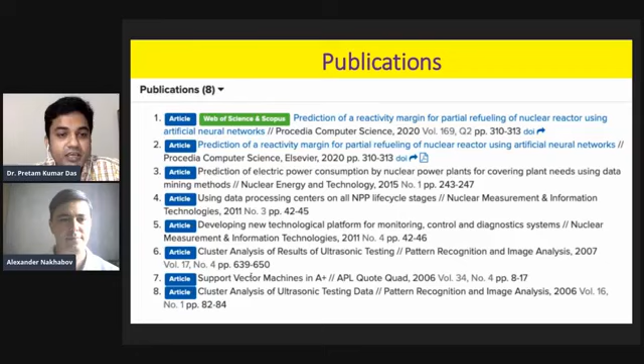His courses at MEPhI include Introduction to Nuclear Power Engineering, Monitoring, Control and Diagnostic Systems in Nuclear Power Plants, non-destructive and destructive testing methods on nuclear power plants, and nuclear technology. We also came to know that he has several publications in different journals worldwide. Thanks for your patience.

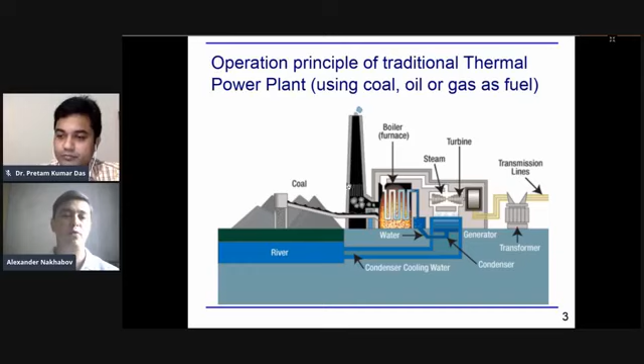So we should have nuclear fuel in some part of this reactor installation. Then we can initialize a fission reaction of uranium, and this fuel will get hot, and using water as coolant of the primary circuit, this heat can be transferred from the fuel to the water, and then in special equipment called a steam generator, this heat can be transferred from the primary circuit to the secondary one. Finally, in the secondary circuit, steam can be produced, and the steam will rotate the turbine, the same cycle as for a thermal power plant. So actually, all the main equipment of the nuclear power plant and all the main difference from a thermal power plant is concentrated inside this reactor building containment. So that's my idea.

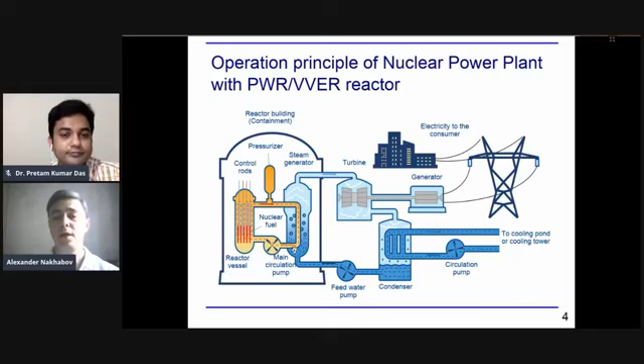As I said at the start of our presentation, I guess a lot of students in today's audience are from different specialties, different programs, maybe bachelor's, maybe master's. Of course, the first question can be: where is physics needed at a nuclear power plant? Because a nuclear power plant is a huge industrial enterprise producing electricity in a safe manner and so on. But this question is very good, because moreover, in the Russian Federation, and I guess in many Western countries, many years ago when we just started to develop this area, faculties of physics were the first, like the cradle of future specialists in this area, because physics is actually the basic course, the basic major for nuclear power plants.

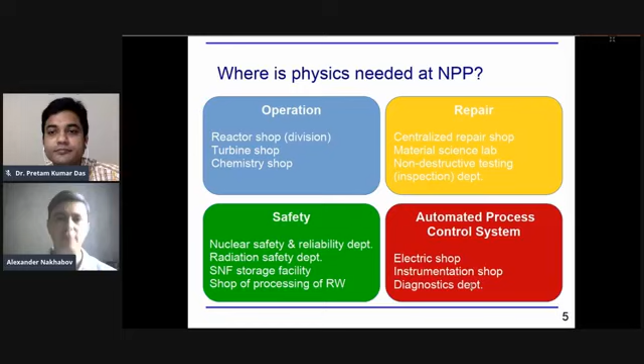For personnel in all these departments, as I know, it's a must to have in the curriculum, in bachelor's or master's programs, the main physical courses as some foundation for future knowledge. Physics is very important as a science and for future personnel of nuclear power plants. But the question is which physics areas are most needed. I'd like to comment on this idea because physics is the foundation of all future knowledge in this area. This picture corresponds to Russian tradition, Russian practice in training personnel for nuclear objects.

First of all, we say about general physics. I think in Bangladesh it looks similar, because in our universities, in MEPhI University, after enrollment in the bachelor program, students during the first two years will have courses in general physics first. The main areas are mechanics, molecular physics, electricity, magnetism, waves, and optics. For all nuclear-related specialties, during the first, not two years, actually 1.5, three semesters, this foundation of base courses in physics will be provided.

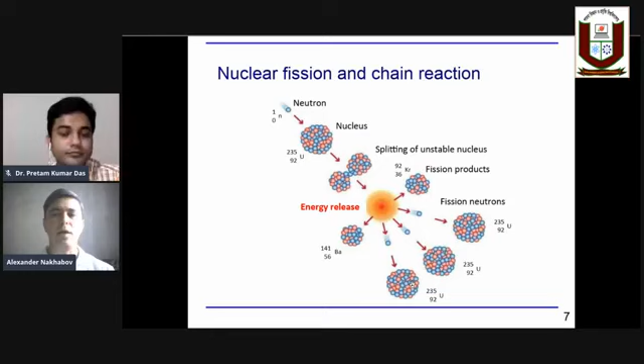And of course, there's the complexity of the task, of calculation and so on, because in a real nuclear reactor the structure is not simple.

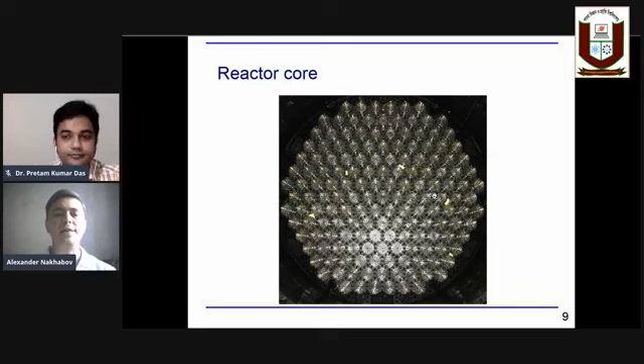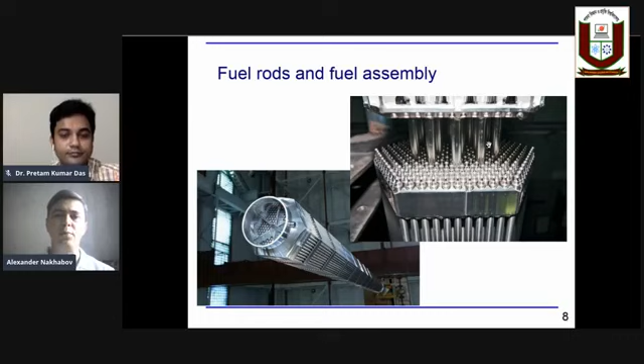Inside every, or rather the majority of, fuel assemblies, there are control rods. Actually, in a VVER reactor, control rods are not separated from fuel assemblies, but in many fuel assemblies there are special clusters, so-called clusters of the control system, located in these tubes. In this way we can distribute these control rods inside the core, just to provide a more even, well-distributed thermal production inside the reactor core.

So, of course, we should provide special courses, first of all regarding specific nuclear knowledge, and you see all these courses on this slide. Of course, these courses are needed first of all for specialists of the reactor shop and specialists of the Department of Safety and reactor diagnostics.

When we provide these courses, of course, first of all, it's lectures, seminars with solving of different problems and so on. If you say about using of computers, of information technologies, first of all, it's codes, special programs to calculate neutron flux, neutron interactions and so on. And of course, all these codes, it's about computers. This knowledge can be provided in special display classes and so on. But learning of these Neutronics courses, it's very desirable to have some labs.

But to provide labs, it's hard enough, because we need to have special facilities as usual. In our university, we solve this problem by collaborating with our partners in Russian Federation, in Obninsk, because Obninsk is the cradle, the place of birth of civil nuclear engineering in the world, because the first nuclear power plant in the world was put into operation in Obninsk especially.

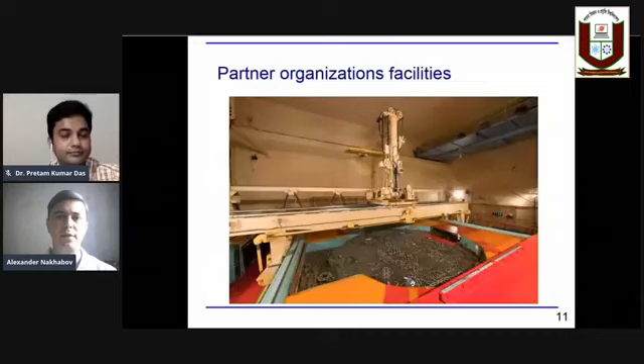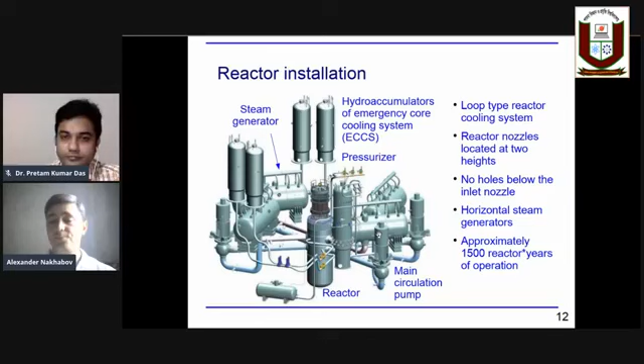And of course, when we say about the working principle of the reactor, first of all we should say, okay, first element, it's fission itself, like we just discussed - fission and heating of fuel. But next, we should consider how to get this heat from the fuel and how to transfer this energy, finally, from nuclear fuel up to the turbine.

During operation, water will go in this bottom line of nozzles of the primary circuit. And we have a core barrel - a special construction which helps us organize this flow of coolant. So water will go inside the reactor through this intake, go down in a small gap between the core barrel and the wall of the reactor vessel, and through special holes inside this core barrel, this water goes inside the core, through all fuel assemblies. In this area, heat from nuclear fuel is transferred to water, and then through the upper line of nozzles with hot water it goes out through the reactor vessel. So this is the idea of how to organize the cooling process.

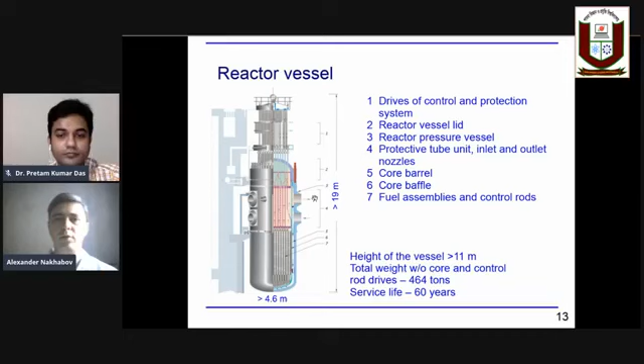And you know, it's impossible to get photos of a working reactor, because during operation the reactor vessel is tightly closed with special construction. But of course, there are several options how to see, how to look at a nuclear reactor vessel.

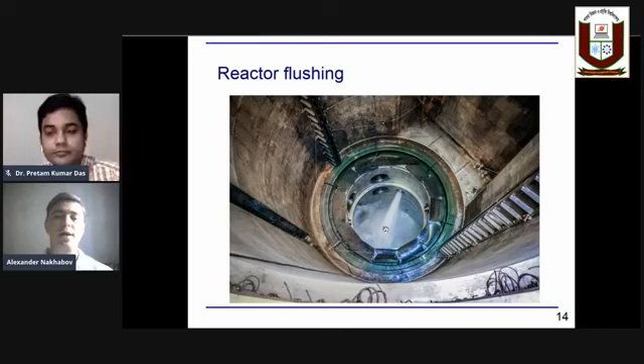And you see from inside the nozzles of the primary circuits. This nozzle, I guess, is maybe from the emergency cooling system, or from the pressurizer - yes, a special connecting line between the pressurizer and the reactor vessel. And fresh water just flushes all pipelines during this stage of testing. So it's just a very interesting photo to give you some understanding of how it looks like.

The next very important element when we talk about thermal hydraulic processes inside the reactor and about operating is steam generators. Steam generators are actually equipment that serves as a bridge between the primary circuit and secondary circuit, because we need special equipment to realize this process of transferring heat from primary to secondary circuit. This process is organized inside steam generators.

The idea is to provide a lot of very thin tubes. A lot means more than 11,000 heat exchange tubes, very thin, only 16 millimeters in diameter. So a lot of tubes are organized in a special manner inside this steam generator.

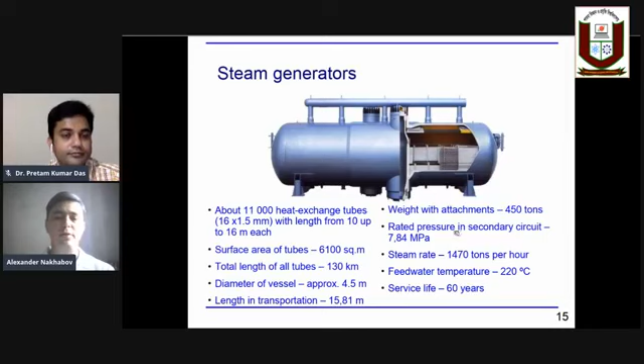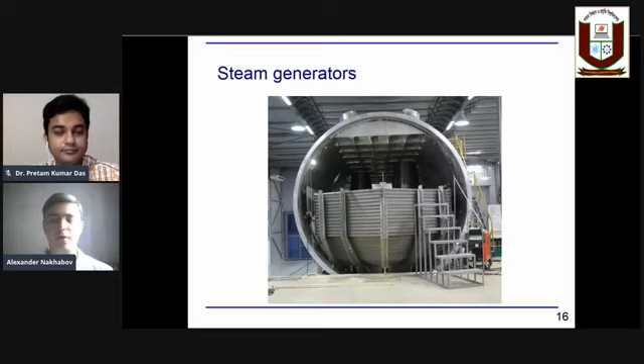But during manufacture, you can see the tubes and the special steam-separating construction in the upper part, and the black, dark elements are actually the collectors of the steam generator. So it's very big, very important equipment.

And of course, first of all, when we talk about main scientific areas, main courses, we talk about thermal hydraulics courses in this area, because to work with this equipment you should have knowledge in fluid mechanics, first of all, in heat and mass transfer, and metrology. Metrology, I guess you have this course in your university, is about how to provide measurements of different parameters and so on.

In our university, we have a very long practice of providing the metrology course based on special equipment, first of all for labs, first of all thermohydraulics equipment. Because on a nuclear power plant, we talk about measurements, but many measurements are, first of all, measurements of flows, flow rates, measurements of pressures in different pipelines, and measurements of temperature of liquids, of steam, and temperature of some elements. So metrology can be based actually on equipment used for thermohydraulics.

When we talk about education in this area, of course there are lectures, practices, and very importantly, laboratory works, laboratory practices. In our university we have a special resource center, because in MEPhI University nowadays there are three resource centers, two centers located in different cities in Russia, many kilometers away from Moscow, and one center located in the Obninsk branch of our university.

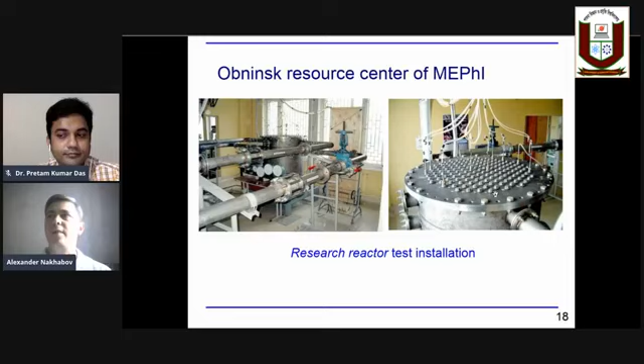We have some model, approximately 1 meter in height and approximately 1 meter in diameter, a model of reactor and pipelines around. And of course, we have some instrumentation to measure flow rates, pressure, and so on. This installation was used for many PhD theses, for student diplomas, and so on.

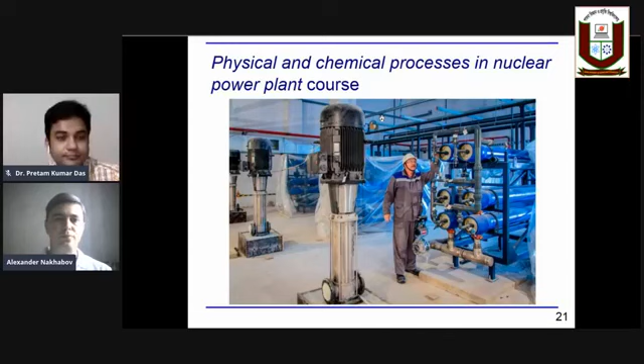The next level of consideration of the nuclear power plant is the secondary circuit, because now we have just considered the core of the reactor and the equipment of the primary circuit. The equipment of the primary circuit is the reactor vessel and all internals, steam generators, main circulation pumps, and the pressurizer. All of this is the main equipment of the primary circuit of the nuclear power plant.

But of course, we should also think about the secondary circuit. From one side, a secondary circuit of a nuclear power plant is not so specific to nuclear, because it's the same area as for a thermal power plant. Of course, the turbine for a nuclear power plant has its own construction, with some specifics in details, but the idea is the same. Nevertheless, the secondary circuit is very important, because especially in this circuit we can provide transfer of energy from steam to turbine, and finally to generator.

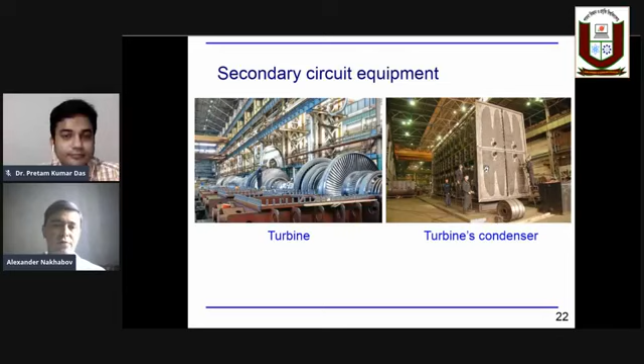So turbine condenser, you see scale, very big equipment, and it looks like modular construction. Inside, this structure you see looks like it has holes of tubes, because the condenser is actually a very big construction with a lot of tubes inside. It's similar to a steam generator, but in the condenser the idea is to provide outside water, for example from a cooling tower, pond, or river, through these tubes just to cool down the steam inside the condenser. So the condenser is very important too for a nuclear power plant. During operation, after mounting, this condenser will be welded inside all other systems.

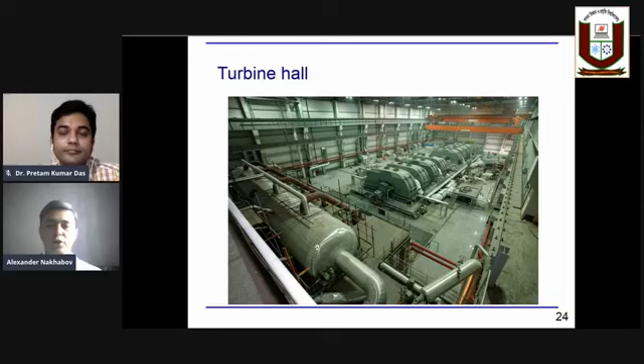And for example, this part is a bearing - a bearing of the shaft of the turbine. And I guess from our side is where the generator is connected to the turbine. And this big equipment in the front of this photo is actually the separator of the turbine, because between stages of the turbine there is separation and reheating of steam, just to improve thermal efficiency.

And all this equipment, the secondary circuit - the whole layout and structure is designed to provide the highest possible thermal efficiency. Every industry installation or facility that produces electricity or provides heat can be characterized by thermal efficiency, measured from 0 up to 100%, and of course our wish is to provide the highest possible value. For a nuclear power plant, unfortunately, this thermal efficiency is not so high as for a thermal power plant.

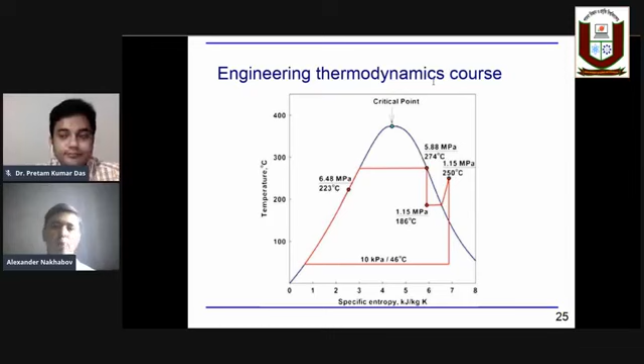When I said about the electric shop and instrumentation shop, of course, it's not nuclear in idea, because the electric shop is usually like electrical engineering, just to provide operation of all electrical equipment - a huge number, starting from usual electrical bulbs and finally up to generators. Personnel of this shop should maintain all this equipment in good condition. And when we say about the instrumentation shop, this personnel is responsible for all instrumentation, all gauges, all devices measuring different parameters. By the way, the number of personnel in these shops is very multiple, several up to 100 personnel in every shop.

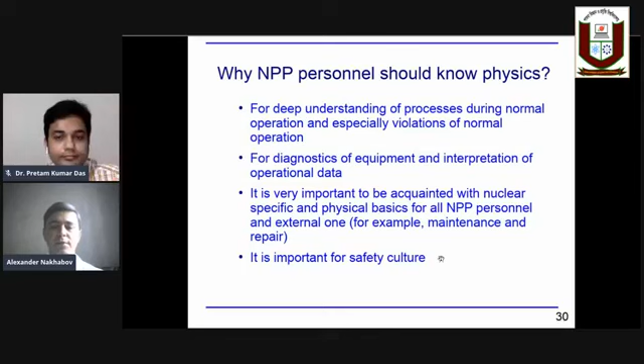Finalizing my presentation, I'd like to briefly say about the installations and facilities used to train students in our university. When we try to provide an upper level of knowledge in nuclear power plant operation, we use special equipment to collect all knowledge together.

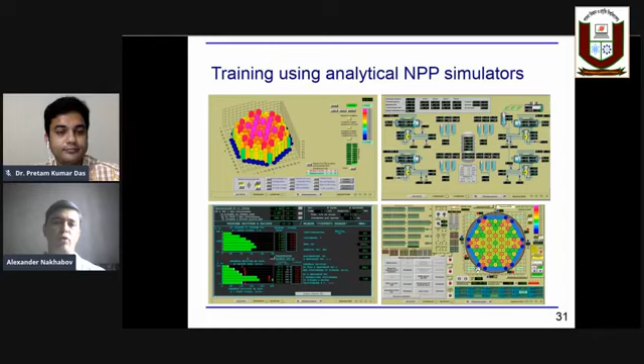You can see on the layout or diagram the cross connection of different variables, pressures, flow rates, and so on. You can model different situations on the nuclear power plant. These are special computer codes to simulate the behavior of the nuclear power plant in computer, which is very important to train future engineers and specialists for nuclear power plant.

Then we have special practical training. As I said, we have resource centers: the Obninsk Center, and two more in Novovoronezh and Volgodonsk. These are cities inside Russia, in the Russian Federation.

In Novovoronezh, there is the first in the world VVER 1200 megawatt power plant. In Volgodonsk, there is nuclear power plant VVER 1000, and also the Atommash manufacturing plant, where all huge equipment like reactor vessels, steam generators, and pressurizers can be manufactured. So we have special training for our students there.

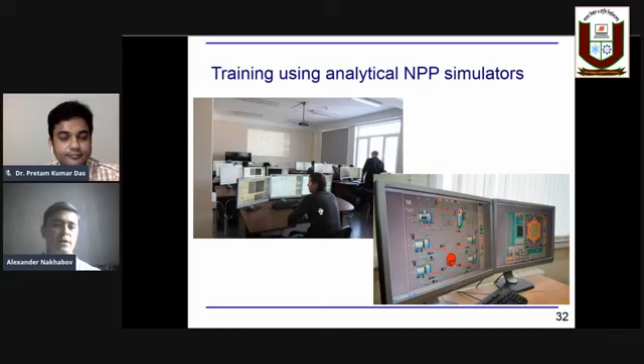Moreover, in Rooppur nuclear power plant, the same full-scale simulator training center will be constructed before startup of the power plant itself.

About safety, very briefly - safety is around all actions during operation of nuclear power plants. First of all, we have protective barriers on the nuclear power plant. For VVER, there are 4 barriers: fuel matrix, cladding of the fuel rod, primary circuit, and containment.

These barriers prevent the release of radioactivity. The fuel structure is a hermetically sealed fuel rod with thin walls, the primary circuit equipment is sealed again, and the containment is the building itself with all main equipment inside.

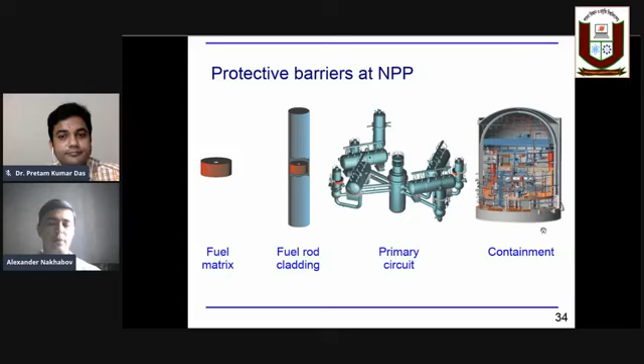I'd like to mention passive safety systems, which are specific to VVER 1200 and the nuclear power plant in Rooppur as well. Passive systems realize different safety functions without any power supply from outside.

When we talk about many systems, some are active ones - good, effective systems, but you need outside power supply to operate them. After the Fukushima accident in Japan, it was proved that a lot of systems should be able to work without any power supply for at least several hours.

So in VVER 1200, there are many special safety systems connected with physics when we talk about safety - many of these systems have no power supply. For example, the heat exchanger of the passive residual heat removal system works without any power supply, compressors, or pumps; the flow of cooling air through this system is provided by natural law without any special equipment.

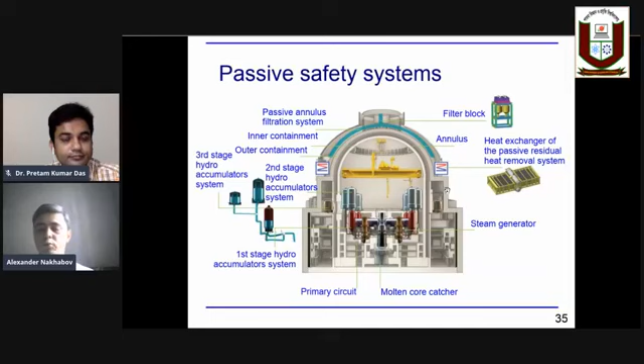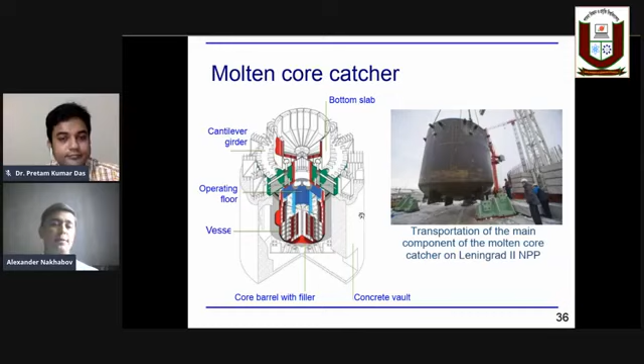One more example of safety equipment is the special molten core catcher, a unique feature of VVER 1200. It's special equipment located beneath the reactor vessel itself. The goal of this catcher is simple: in case of the very small probability of core melting, it should collect all the corium, all the melting fuel with steel and so on, and distribute it in such a way to minimize radioactive exposure, and provide cooling and finally freezing of this corium. It's very interesting, both physically and chemically, how to provide this distribution of hot molten fuel and realize cooling and stabilization. So it's one example of a very interesting element of the safety system.

I think it's enough for our short presentation. Thank you very much for your attention, and I'm ready to answer your questions.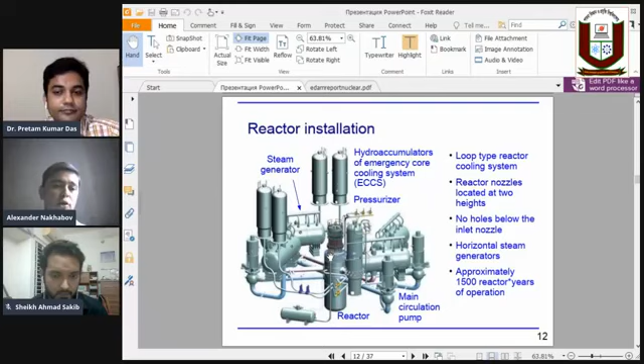You see, yes, a hydroaccumulator and pipeline between the hydroaccumulator and primary circuit. And of course, there is some valve on this pipeline, and this valve is fully automatic. After a decrease of pressure beneath some threshold, this valve will open automatically, and all water from the hydroaccumulator just goes inside of the reactor vessel. In this way, for some short time, we can provide a huge volume of water in the primary circuit.

Moreover, for modern VVER, on this picture you see actually the next stage of VVER, so-called VVER-TOI, and this power unit is not for export now. The first VVER-TOI is now under construction in Russia. For VVER-TOI, there will be three stages of hydroaccumulators, while for VVER 1000 to 1200 there are two stages, first one and second one, for different thresholds of pressure.

And actually, this system, for the first time, just after a possible accident, is designed to provide a lot of water inside of the reactor. If we need to provide cooling after this time, we should use other systems for these reasons. So that's my answer for this question.

Thank you, sir. So we have another question, maybe the last question. Is it safe to build an NPP in a populated residential area like Ishwardi or other place? What's your opinion? Maybe I can't get the idea of this question. Could you explain, please? So actually, he wants to know, is it safe to build an NPP in a populated or densely populated area? Do you mean a dense area? You mean population around? Yes.

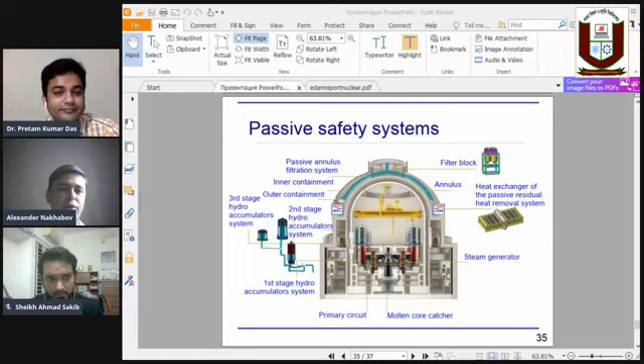Of course, all these manipulations should be provided in a special safety manner. And especially for this reason, there are a lot of special sensors to measure neutron flux and temperature, just to provide this safe possibility, because nuclear reactors are special devices to provide this critical situation.

Okay, thank you, sir. So maybe this may be the final question: is it possible to construct a mini reactor instead of a mechanical engine, which can be used in a car, bus, etc.? Which kind of reactor is it possible to use, a mini type reactor, in a bus or car, to replace the mechanical engine? One student actually asked about this.

Actually, maybe I don't get the idea. Yes, very difficult, because there are different types of reactors. Maybe you could reformulate this question.